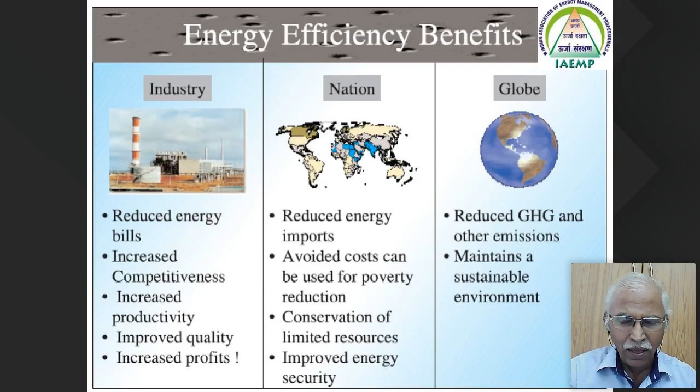So the main idea is, why should an electrical or mechanical engineer, once coming out of college and becoming a maintenance engineer for a given industry, get elevated to the status of energy manager? Previously, industry thought: let the maintenance engineers just do their core engineering job, either mechanical or electrical maintenance.

Or if it's civil - building maintenance, building renovations, or construction of buildings, and all other things. But the Bureau of Energy Efficiency has said one thing: let us make core engineers into energy managers, where they are not only consuming energy but also conserving it.

Once you become the energy manager as part of a designated consumer in the industry, there is demand for energy managers throughout all industries and all segments now. So for a given company, once you enter, the energy conservation plan isn't just about energy audits and conservation - market competitiveness is more important now.

And it is definitely supported by the government, because energy conservation is at the bottom of the energy pyramid. If you take the energy pyramid, energy conservation is at the bottom, then comes energy efficiency, and then comes renewables. So every industry is looking into this as energy.

When you enter the industry, apart from your core engineering discipline, they want to know whether you are energy conscious, whether you have awareness towards energy, and what the energy scenario is. All these things are important once you enter the industry. In fact, in many interviews conducted by MNCs, everyone is looking - apart from core engineering - for energy management knowledge from young students like you.

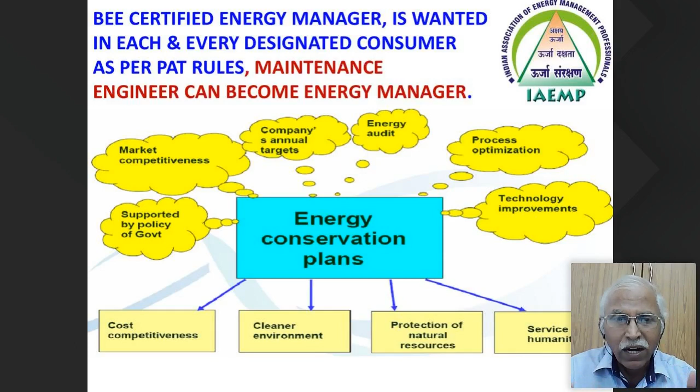The opportunities, especially for BEE certified energy managers, are not limited to any small sectors - it's open to all sectors. These are the designated sectors mentioned by the Government of India in the Gazette, where we have ample scope: thermal power stations, aluminium, cement, fertilizer, iron and steel, pulp and paper, textiles, chlor-alkali, railways, distribution companies, refineries, and commercial buildings.

Especially iron, aluminium and textile - especially spinning mills - they use 100% electricity. So they have more aluminum smelters and more energy use, measured in MTOE, the million tons of oil equivalent, that has to be maintained within or above the threshold, meaning they need a designated energy manager for the given industry.

Automatically, many industries don't have energy managers. Once you are out of college and work for 2 years in any core engineering company, and parallelly pursue studies in energy management, you have an excellent escalation in your salary and improvement in your career, and you can definitely come up in a big way.

Presently, every organization is looking into energy conservation and consumption. They don't want to see the consumption, they want to see the conservation aspects. This is where we directly fit into the slot like bullseye. We work to improve the environment, improve the work culture, reduce energy consumption, and work in tandem with the production managers.

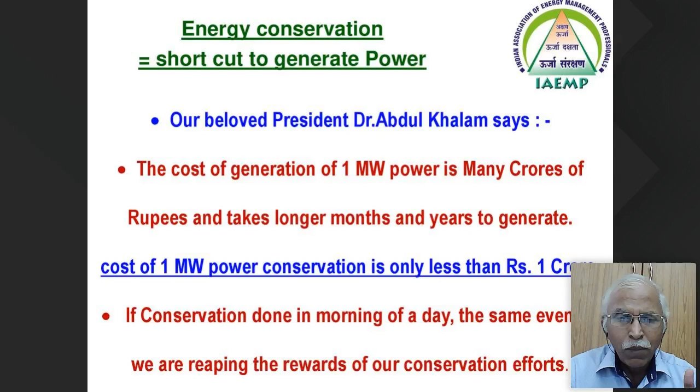So let us follow what our Dr. APJ has said - this is applicable to all industries. He used to say we had a T&D loss of 40% in the year 2005. Now it has almost come down to 20%, and it is going further to 15% now. Once the T&D losses are reduced, automatically the DISCOMs are going to prosper, and definitely the industries are going to get a better, lesser price for the electricity they are paying now.

Let us always analyze India versus the world. The T&D loss in Germany is around 7%, in China around 7%, and in many Western countries it's in single digits now. But in India, as I was telling before, it was almost 40% in 2005. It has come down to almost 20% in 2019, and by 2020 we are planning for 15%, and we want to reduce it further.

This means when we are having to generate almost 80% more demand, electricity demand is there for the next 10 years, this T&D loss needs to be definitely reduced. This is where smart metering has already been trialed, and millions of smart meters have already been applied in many states in India.

You find that 1.5 lakh crore rupees of revenue for the utilities can be improved by smart metering. This includes two-way communication, net metering, cyber security, prepaid meters, and time-of-day tariff meters.

All these aspects we could see — 10, 20 years back we had electromechanical meters, which were not able to even sense 15 watts of our night bulb. But these trivector electronic static meters are able to sense even a few watts, less than 5 watts. This generates revenue for the DISCOM, almost 1.4 lakh crores. The government is thinking of going for almost 25 crore smart meters, and we will be part of this smart metering too, especially to address T&D loss and raise revenues of the DISCOM sector.

In the DISCOM sector, you will also find cloud-based energy management information systems, where the scope for energy management is done on a cloud-based system. We use wireless application protocols, RS485, RS232, Modbus, and even Google has gone for cloud-based computing. As far as the industry is concerned, even ISO 50001 industries have gone from wired systems to this.

Now everything has changed with IoT. A lot of improvements have been made on this EMIS also, and these cloud-based energy management systems are easy to integrate with the existing system, easy to operate, and you can project it to the management — whatever energy consumption is there, and whatever is conserved, these things are put on the cloud and given to the management.

These give you the return on investment on the existing system. This is what the management is looking for, and you fit right into this slot where you have a good scope to show what energy is consumed and where the scope for energy conservation is possible within the industry.

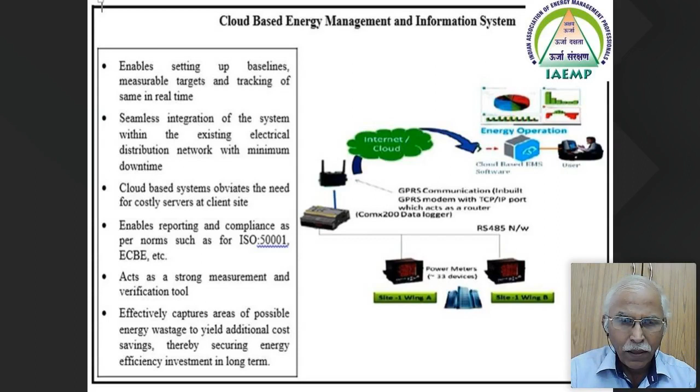Career opportunities — right now, from all the Navaratnas, for all the PSUs, leave alone the core engineers, if you certify yourself as energy managers, the scope for increasing your salary hike as well as your placement will be much faster and better if you tie up your existing core engineering with energy management. You can know what is energy efficiency and what is energy conservation.

The market is already there, and the internet is giving all the inputs on energy conservation and energy efficiency. Many college students who have passed out in the last couple of years, if they are well-versed in this, are able to converse well about energy conservation and energy awareness to industry recruiters, who are very much impressed.

They want students to have energy conservation knowledge — basic knowledge especially applied at home, in college, and especially during industry visits. If you are trying to improve upon it, they are more interested to know what all you have learned extra apart from your core engineering. This is where we stand a chance.

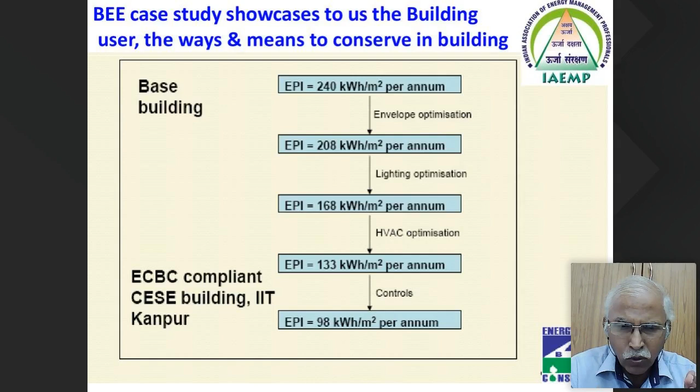Coming to the building case study, from 240 units per square meter we are able to bring it down to 100 units. This reduction is possible thanks to the energy conservation measures taken by the IIT towards ECBC compliance, the Energy Conservation Building Code. With envelope optimization, we achieve almost 15%, from 240 to 200 units. Then lighting optimization, then HVAC optimization. This is where the scope is excellent in India now. And then comes the controls.

So these are the areas as far as the building sector is concerned. Electrical, mechanical or civil engineers, any core engineers, can fit into this slot to address building design: in what areas you can bring sunlight and ventilation inside the building. This is a critical area. We talk of Vastu in our ancient traditions, but the same thing is applied in building design, bringing in sunlight and ventilation. Then high performance walls and roofs: fly ash bricks, underdeck and overdeck insulation on the envelope side, then double glazed and triple glazed glass units to insulate the inside of the building from the outer ambient surroundings.

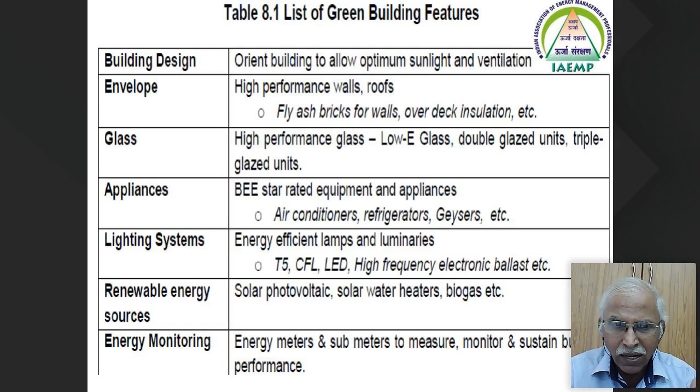Then appliances: BEE has already given star ratings. Go for appliances with a higher star rating, like 4-star or 5-star, especially air conditioners, refrigerators, geysers and others. On the lighting side, we have already gone from T5 to LED, and LED is going to stay for more days. Even organic LED is coming up, but the lumens per watt is sustained in LED. We will see it in later slides. Energy metering, sub-metering and energy monitoring is the only way to target energy reduction.

So the government says, let us go by the 4 factors: energy, efficiency, equity and environment. This is the National Action Plan on Climate Change, started almost 10 years back. These are getting implemented now; it is not in the initial stage, it is already taken up. It is the ripe stage where we can enter into the National Mission for Enhanced Energy Efficiency. These 4 E's are going to play a big role in the sustainability of India for another 50 or 100 years or more. What we have received from past generations, we have to carry to the next generations, achieving sustainability not only in energy but in all process inputs as well.

Take the building sector: buildings consume almost 30 to 35% of the electricity consumption in India. I am just concentrating on electricity, but it is not only electricity, other types of energy also. But for 1 unit of electricity, we are spending almost 1 kg of coal. The thermal stations are running at only 30 to 35% efficiency, and 1 kg of coal is producing only 1 unit of electricity.

Before, it was consuming almost 6 liters of water to produce 1 unit of electricity. Now the norms have come, they have to use only 2.5 to 3 liters of water to produce 1 unit of electricity. So these are all the virtual embedded energy in all the segments of the industry. In the building segment, it is 30 to 35% of electricity consumption, and commercial buildings are the largest energy guzzlers now.

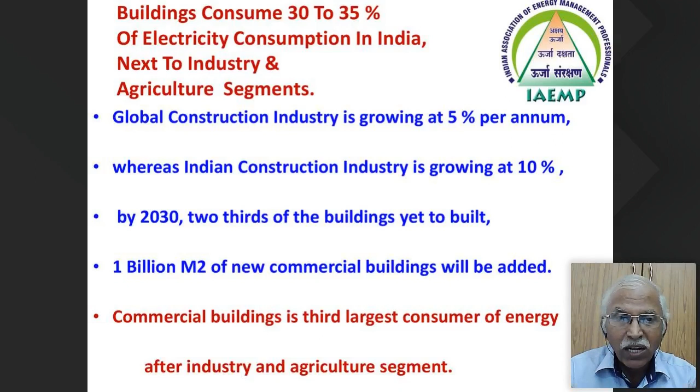Coming to the building, what is the energy breakup? If we see, almost 60% goes towards HVAC, that is heating, ventilation, air conditioning, and controls. Apart from that, the refrigeration. This takes 60%. This is the area where IGBC and ASHRAE, everyone is concentrating,

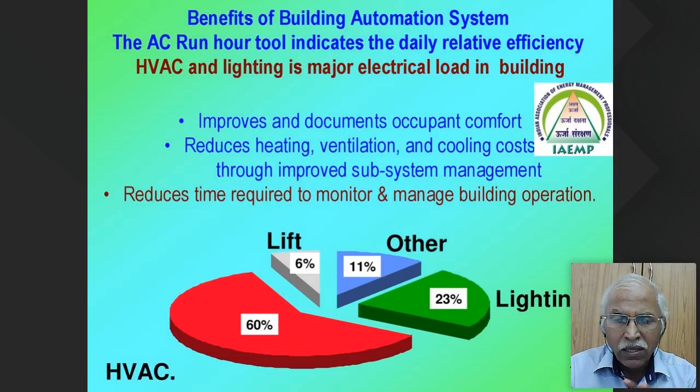especially in the COVID period. You need to have fresh air in the building, and you need excellent air conditioning maintained at a higher temperature, not at 20 or 22 degrees. Almost it has gone to 27 degrees now. The government has already stipulated that you keep your air conditioners at 24 degrees and above. So if you see the breakup, HVAC takes the lion's share. We can address that also.

This is why HVAC is needed for a country like India, especially in our premises: whether we need air circulation, air cooling, or air conditioning. For air circulation, ceiling fans, especially BLDC fans, are doing an excellent job. It takes only 10 watts per square meter. Air cooling, like coolers, takes almost 40 watts, 4 times. But air conditioning takes almost 20 times the power for conditioning the premises.

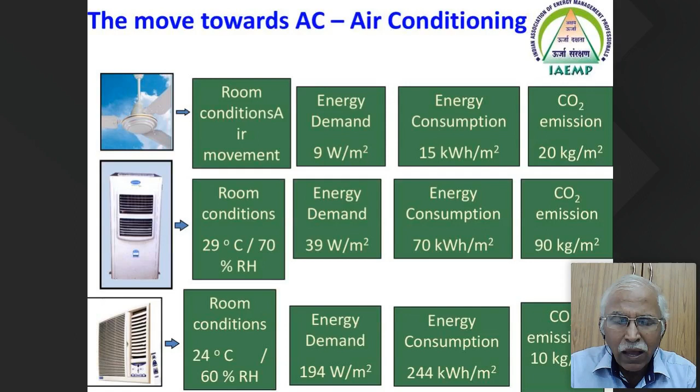So minimizing air conditioning and increasing air circulation will definitely improve the premises' air circulation. Positive cross ventilation is achieved in the premises. The norms also vary now. With air conditioning, you definitely combine the ceiling fan, especially the BLDC fan. It gives precise air circulation for the given area, and this can improve almost 10 to 15% on the air conditioning cost for a given premises.

Whether it is a split AC or a package unit, if you put the ceiling fan on, instead of a 22 degree setting on the air conditioner you can increase it to almost 27 or 28 degrees, and you will see human comfort. This is what everyone is looking into now, post-COVID. Our body temperature is only 37 degrees. It is very wise and prudent to maintain around 27 degrees, and you can see 15% power savings on the air conditioners.

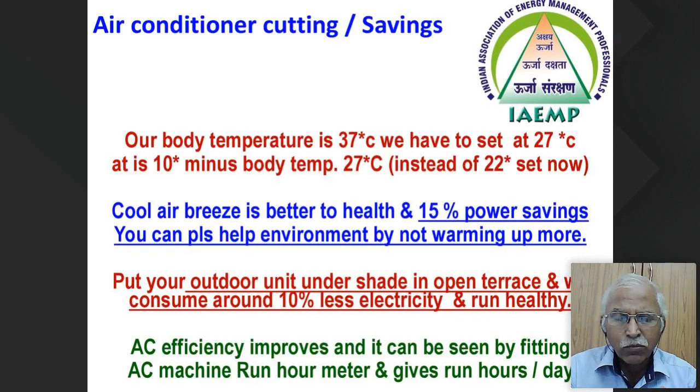When you put the outdoor unit on the outer side, if you provide a weatherproof shade for it, this also reduces energy consumption by 10%. So the scope for air conditioning is very much more, thanks to the latest innovations. The part load efficiency of an air conditioner was 1 to 1.5 kilowatt per ton some 5 years back. But thanks to the star ratings of BEE and ASHRAE norms, now it is only around 0.5 to 0.75 kilowatt per ton for a given air conditioner.

BLDC, brushless DC fans, is another area. The World Bank has invested almost $300 million in India to promote BLDC fans, giving a subsidy to BLDC OEMs. When a fan consumes 60 or 80 watts, this consumes only 30 watts, and in the mid speed it consumes only 25%. So let us make use of BLDC fans, and we can bring down the total energy consumption of all commercial buildings, including colleges and the hospitality sector.

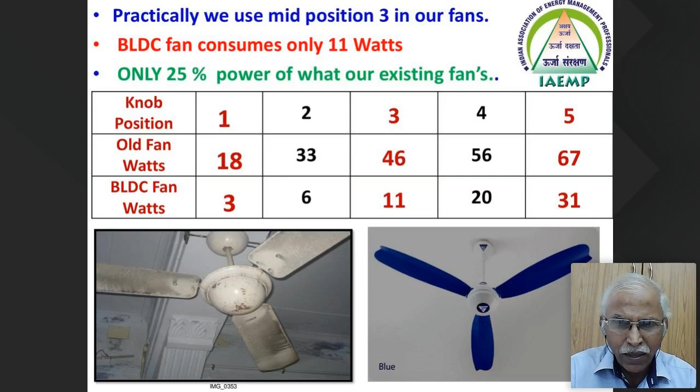Star ratings: the Bureau of Energy Efficiency gives a lot of weightage to star ratings because domestic consumers have to change. Whatever fridges we have used in our house were consuming 3 units per day. Now the latest 5-star rated fridge consumes only 1 unit per day. Almost 70% savings is possible on refrigeration appliances. This is applied to fridges, and this is applied to fans.

We say the service value of the fan: for 50 watts, if it is giving almost 200 cubic meters per minute, it is called a service value of 4. A BLDC fan gives a service value of almost 5.5 to 6. So star rated fans definitely improve the circulation and give comfort to the user, at an optimized consumption of less than 50 watts, less than 40 watts, now 30 watts to 28 watts.

ASSOCHAM says that if the energy consuming appliances in industry and domestic use throughout India are replaced with 5-star rated appliances, almost 1.2 lakh crores of rupees can be saved. Almost 20,000 megawatts of power can be saved per year. This is to be implemented, horizontally deployed on all the domestic sector, commercial sector, and all the industrial sectors as such.

In the energy audit, what is used? When you are entering the industry, you need to know what the energy audit is and what energy conservation possibilities can be done in the industry. The energy audit instruments are the power quality analyzer, the load managers, the lux meters for lighting, the anemometers, and the clamp-on meters. Some cost less than 10,000, some more than 1 lakh. The industry can select to suit its needs.

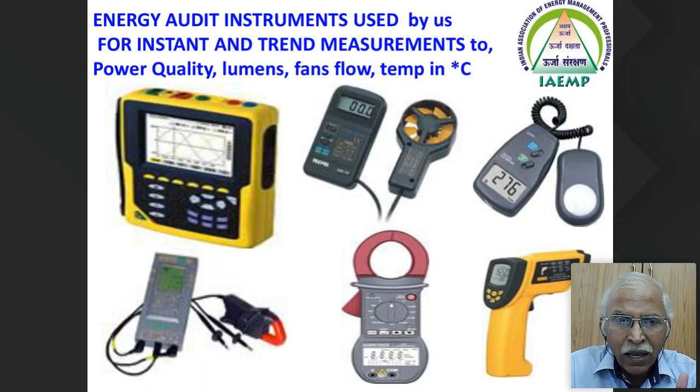Thermal imager. We are going not only for condition based monitoring but also for predictive monitoring. The thermal imager was costing almost 4 lakh rupees some 5 years back. Now it has come to less than 1 lakh, available from 50,000 rupees to 1 lakh. In the Indian Textile Federation, ITF mills, more than 200 to 300 mills purchased it in a span of 2 years.

This infrared based thermal imager is able to sense the temperature gradient happening in the motors, in the electrical circuits, and in the process. Any temperature more than 20 degrees above the existing condition, in existing piping or in the process, is a loss to the system that can be addressed immediately.

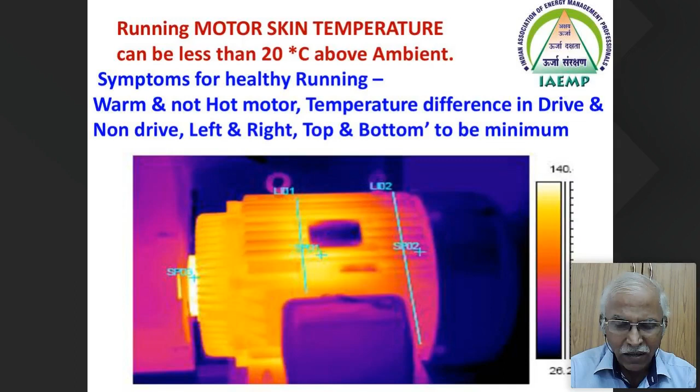Next, I'm covering the macroscope of the Indian energy scenario, energy conservation and audit in industry, energy management, and when entering the energy audit side, what is done on buildings and on the pump side. If you see the pumps, especially in the case of Tamil Nadu, we have 20 lakh pump sets on the water supply, all having an efficiency of 20 to 30% only.

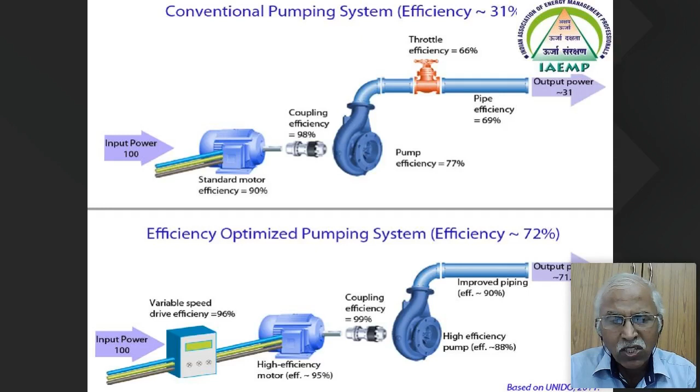Definitely the pump efficiency has to improve, and the pumping system efficiency also has to be improved. The existing efficiency of pumps is almost 31% only, and this can be improved to 72% thanks to VFDs and the reduction in piping losses, apart from the replacement of pumps. This is a systematic improvement done on all aspects of the system, to correct it and improve from 30% to 70%.

If you see just a replacement of a 7.5 HP pump, it is replaced with a 5 HP pump. You can see it is not only the pump getting replaced; the suction pipes, instead of a GI pipe, are changed to white PVC pipes. Instead of a 65 and 50 mm size, we have gone for a 3-inch size. Why are we going for higher sizes of this pump suction and delivery? I will tell you in the next slide.

Piping plays a major role. Almost 30% loss is happening only in the pipings. Then the foot valve. This is addressed to the civil and mechanical engineers, where they have to know not only the electrical aspects of the pump, how much the pump is in kilowatt or HP, but what is the deliverable of the pump, what is the flow, that is LPS, discharge liters per second, what is delivered on a 7.5 HP pump, and what is delivered on a 5 HP pump.

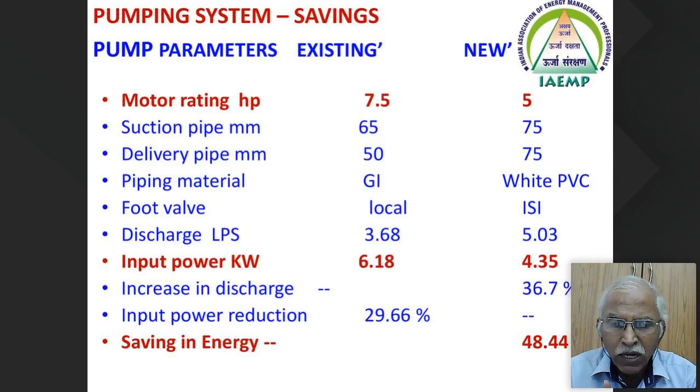From 3.68 we are able to improve to 5.0 thanks to the pump replacement and all the system replacement like piping and the foot valves. Almost there is a savings of 50% in this. It is not only on the pumps. This is done by the Bureau of Energy Efficiency, especially in the agriculture sector. Our CRI pumps, they have done this from Coimbatore. Almost 3,500 pumps have been replaced at a cost of 7 crores. A pump cost only 20,000 rupees.

If you see the return on investment, especially as a trader or an investor, from the home or from the office, you can see I am putting 1,000 rupees, I am getting 360 rupees at the end of the year. Almost 36% is the return on investment, especially on the energy conservation side. This is what we are concentrating on now.

Yeah, a 20,000 rupees pump I have invested for the farmer. The BEE has taken the steps to give it to the farmer, and he is able to get almost 7,200 rupees through the energy savings. Almost 30 to 40% is the savings that is possible in the pumps. This is what we are concentrating on, not only in the pumps, in all the industries. So not only the pumps,

it is on the water. Especially the Gazette has already said since last year, 2018, go for aerators on all your taps. If your tap is consuming 10 LPM, 10 liters per minute, fit an aerator, retrofit. This will consume only 3 liters; almost 70% reduction is possible. The Gazette is already passed.

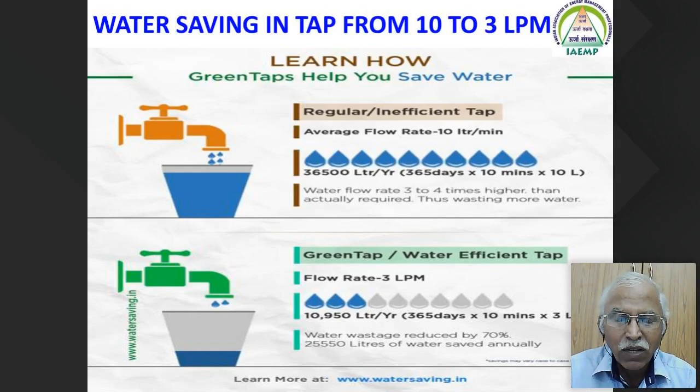Many of the buildings, hospitality buildings, even houses, even commercial ones, have started retrofitting these aerators that reduce the tap usage. The water leakage or usage has to be minimized, because water is the basic form of energy conservation to be thought of, not only for this decade; for thousands of years we have to think of water because it is very precious and very little is available to us now.

So whatever is the purchasing cost, you are buying a motorbike for 50,000, means you are spending 2,000 rupees towards the petrol. But you are buying a 20 HP motor, per month it is costing almost 50,000 rupees towards the electricity bill. If it is an excellent motor, it consumes only 40,000. If it is an ordinary IE2 or IE1 motor, it consumes 60,000. If it is an IE3 motor, it consumes only 40,000.

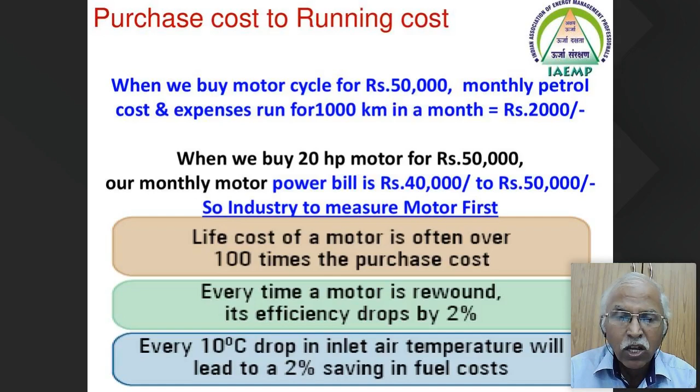So this is where the life cycle costing of a given motor comes in: the cost of a motor is only 1%. The electricity consumption we are paying for the motor is almost 99%. So this is the area we are concentrating on, the running cost of the motor.

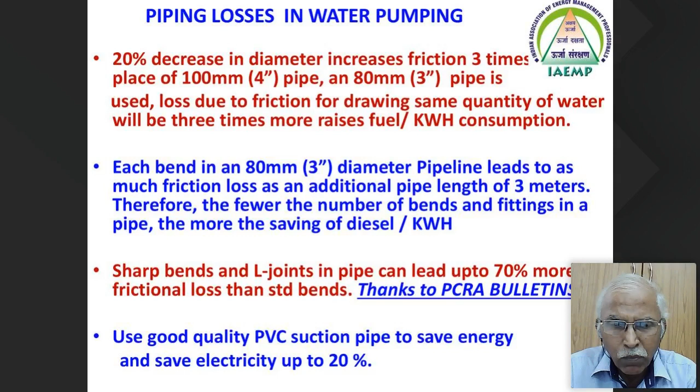This is very much applicable to the civil side as well as to the mechanical engineers. You need to know the load of the system on the given motor. A 3-inch dia pipe, if it has a sharp bend, is equal to an increase in length of almost 3 meters. That is why PCRA, the Petroleum Conservation Research Association, coming under the Ministry of Oil and Gas, always gives tips on energy saving. They say you can reduce the friction loss in the piping by almost 70% by going for long bends.

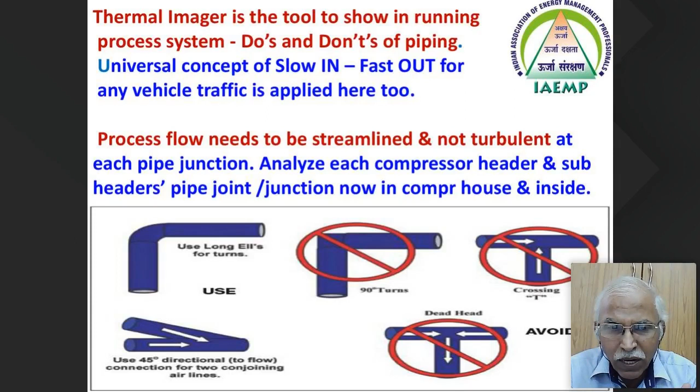Whatever is applied to road traffic is applied to all the process piping also. Go for a slow in and fast out on all your bends, traffic bends. This is applied to process pipings. In the pipings, there is a loss of 30%. This can be reduced to 10% by improving the pipings, the bends and the long bends. If you go for this, that will definitely solve the piping losses.

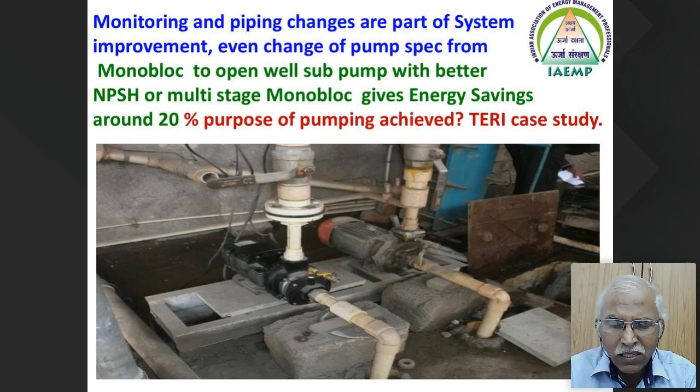Going from a monoblock pump to a multi-stage monoblock, or from a monoblock pump to an open well submersible pump, improves the efficiency by 20%. With replacement of pumps, a minimum of 20 to 30% is seen as per the TERI case study.

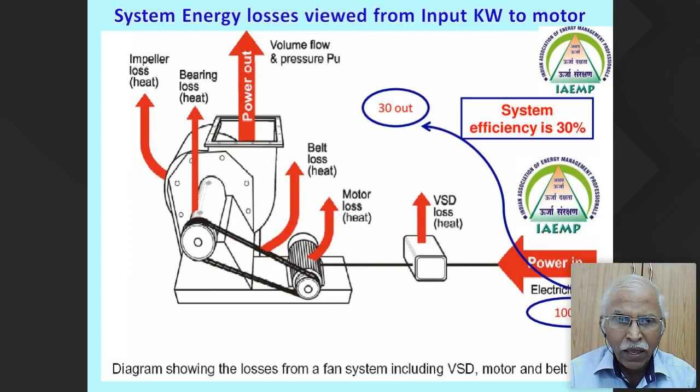Coming to the blowers, these are all the aspects we are concentrating on in the industry. A blower consuming almost 100 units means only 30% is delivered. For a 5 HP blower, say 3.7 kilowatt is given as the input, only 2.2 kilowatt is coming as the output. 40% is the loss. This is going as heat. These are the areas where blowers can be concentrated on.

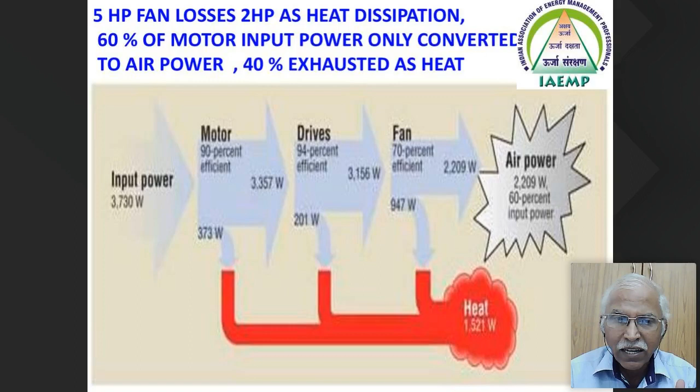The Bureau of Energy Efficiency says, study all the nameplates you see in the industry. The nameplate gives a lot of inputs. Blowers have an efficiency of 60 to 80%. It's a peak load efficiency. Follow the blower curves, the fan curves; that will show where you are going to operate and how you can operate the blowers.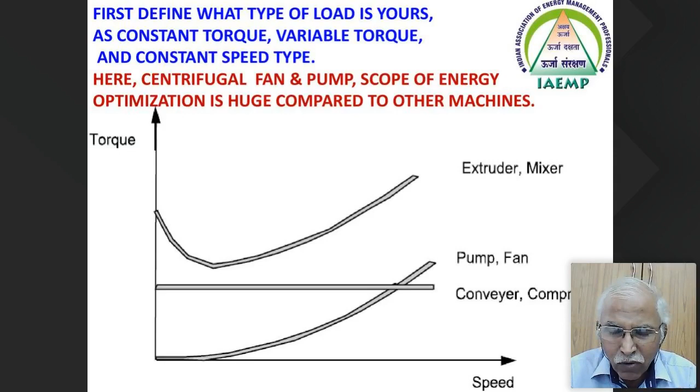Constant torque loads are used for flexibility of improvement on the machines. Constant power loads are especially metalworking loads, where the initial torque is more, and once running, it goes down and then it increases, especially on extruders or mixers.

This is a typical case study done on blowers. Thousands of air handling units are all blowers. At LECS, Coimbatore, where we did this energy study, we could find almost 50% savings for an air handling blower of 5.5 kilowatt. Instead of operating at 1440 or 1450 RPM, they are operated at 1215 RPM, and you could get the same RPM with a change of belts and pulleys and the VFDs.

We are able to operate the same 1215 RPM at 45 Hertz, at 35 Hertz and 27 Hertz. At 35 Hertz, it gave a savings of almost 37%, and at 27 Hertz, almost 49%. So air handling units, used in a lot of industries, air washer plants, air conditioned premises, HVACs, and building segments find an excellent scope of 30 to 40% in all the blowers in the industry.

The Bureau of Energy Efficiency mantra says, if 1 unit of electricity is wasted, 50,000 rupees is lost over the year in a 24/7 industry. So measure the energy first to manage the energy. Wherever it is measured, it gets focused. The management focuses on the area that is measured. Where it is focused, it can be improved upon.

Where the energy or electricity use is improved, it gets recognized and can be horizontally deployed throughout the industry. Once it is recognized, it is shared by all, and you get highlighted. You are an energy manager, you have done this in your industry, it is told throughout the industry and other segments, and you are propelled to the top. You are highlighted by the management, because energy conservation is the area getting the limelight now.